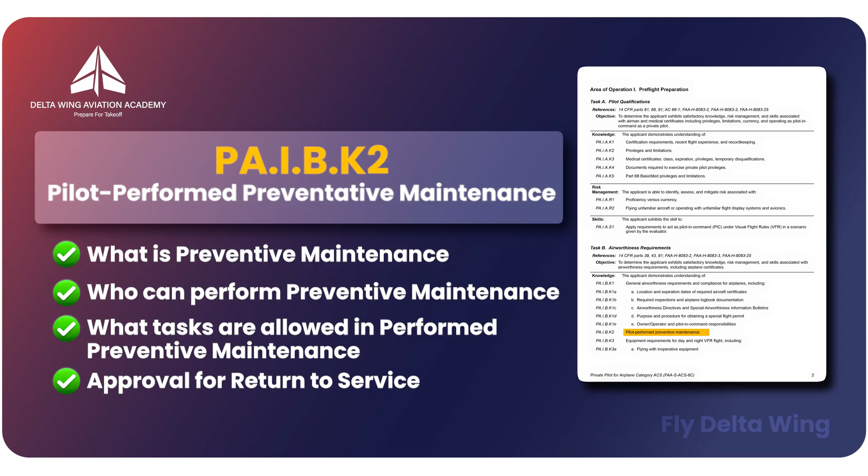In this video, we will focus on PA.I.B.K2, pilot-performed preventive maintenance. What is preventive maintenance? Who can perform preventive maintenance? What tasks are allowed? Approval for return to service. Logbook entry requirements. Before we begin, keep in mind that FAA regulations will appear on screen throughout the video. Feel free to pause, take notes, or capture screenshots for revision.

Now let's go step by step together. We'll break everything down using simple explanations, real-world examples, and checkride-focused understanding, so you can confidently apply this knowledge in exams and real operations. And if you're short on time, don't worry. Stay until the end, where we'll summarize everything in a quick and easy revision format. All right, pilots, let's begin.

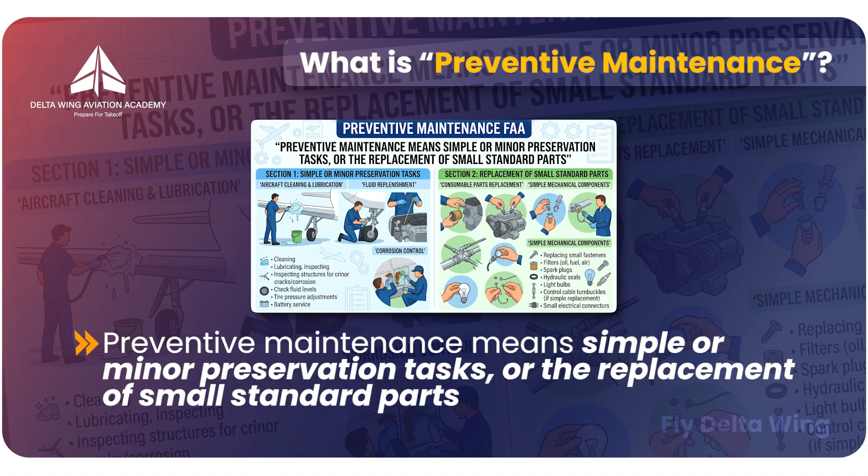So first, let's understand what preventive maintenance actually means. According to the FAA, defined in 14 CFR Part 43, Appendix A, and explained in the Pilot's Handbook of Aeronautical Knowledge, preventive maintenance means simple or minor preservation tasks or the replacement of small standard parts. It does not involve complex assembly or major disassembly.

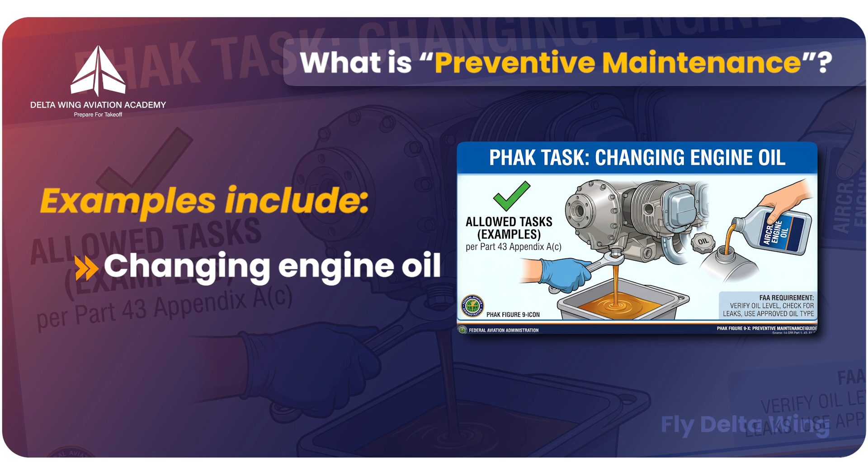The Pilot's Handbook of Aeronautical Knowledge, Chapter 9, defines it as simple or minor preservation operations that do not involve complex assembly. Examples include changing engine oil, replacing a tire, installing new spark plugs. You can find a full list in PHAK Chapter 9 and FAA Part 43 Appendix A. Now let's move on to who is actually allowed to perform it.

According to 14 CFR Section 43.3, any person holding at least a private pilot certificate may perform preventive maintenance. Key conditions: the aircraft must be owned or operated by the pilot. The aircraft must not be used for commercial operations, Part 121, 129, or 135. Part 121, air carriers. Part 135, air taxi. Part 129, foreign air carriers. The task must strictly qualify as preventive maintenance under Part 43. Since private pilots typically operate under Part 91, this requirement is usually satisfied.

Checkride tip. Under 14 CFR 43.3, a private pilot may perform preventive maintenance on an aircraft they own or operate, provided it is not operated under Parts 121, 135, or 129, and the task is listed as preventive maintenance under Part 43, Appendix A. Now let's move on and see what exactly is allowed. What preventive maintenance tasks can be performed?

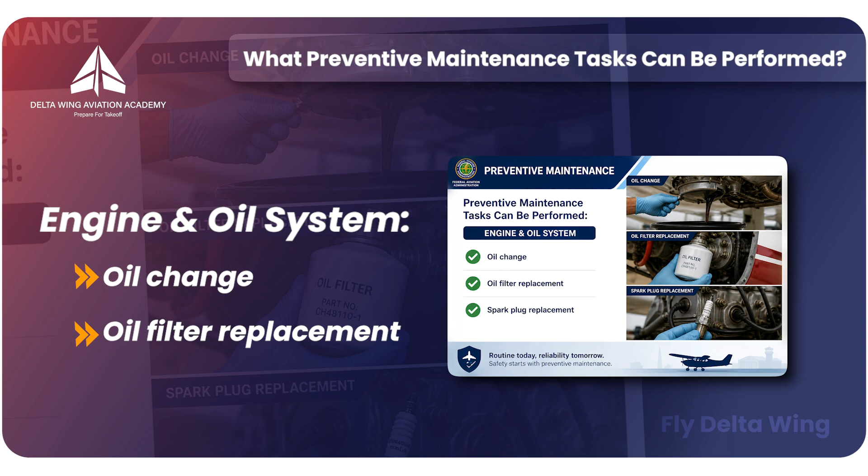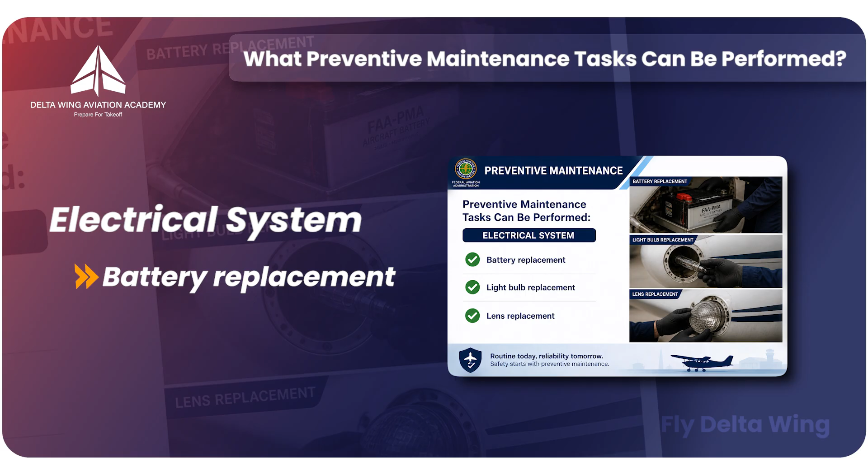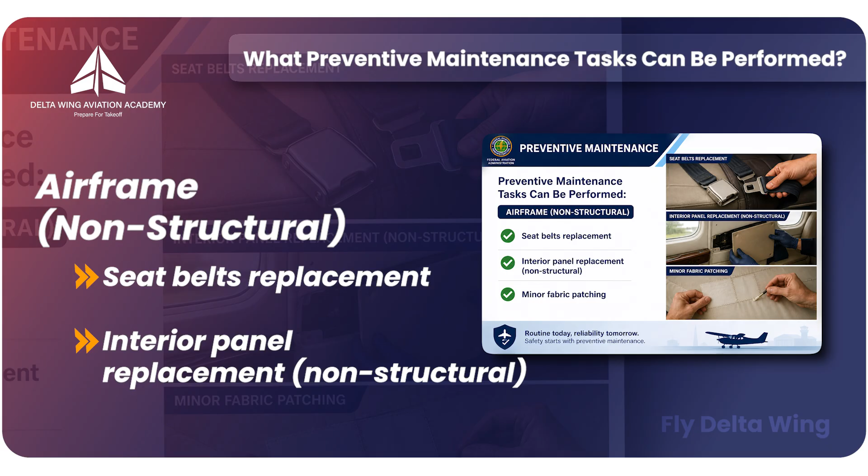Engine and oil system: oil change, oil filter replacement, spark plug replacement. Landing gear: tire replacement, tire servicing, minor strut servicing. Electrical system: battery replacement, light bulb replacement, lens replacement. Airframe non-structural: seat belt replacement, non-structural interior panel replacement, minor fabric patching. Hardware and miscellaneous: safety wire, cotter pins, standard bolts and nuts, lubrication.

What is not allowed? Engine overhauls or repairs, structural repairs, avionics installation or complex wiring, any major disassembly or reassembly. Easy way to remember: simple plus no complex assembly is preventive maintenance. Now let's move on to an important concept: approval for return to service.

According to 14 CFR Section 43.7(f), return to service means the required maintenance certification that confirms maintenance has been properly performed in accordance with applicable regulations. Simple explanation: after any maintenance, including preventive maintenance, the aircraft may not be operated until it has been properly returned to service in accordance with FAA regulations.

This means the maintenance has been completed correctly, the required logbook entry has been made under Section 43.9, and the appropriate person has signed the return to service statement. Now let's move on to who can actually approve it. A&P mechanic, yes. FAA repair station, yes. Private pilot, yes, only for preventive maintenance they personally performed under Section 43.3(g).

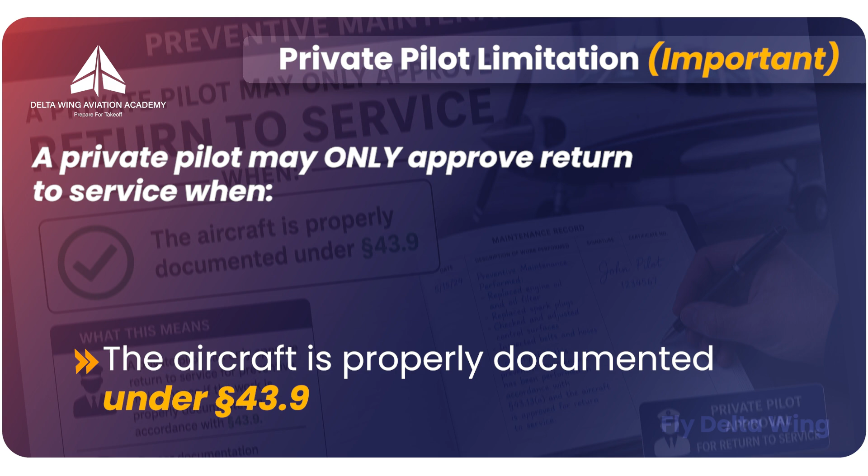Private pilot limitation, important. So here's the limitation you must remember. A private pilot may only approve return to service when they perform preventive maintenance themselves, the task is listed under 14 CFR Part 43, Appendix A, the aircraft is properly documented under Section 43.9, and the aircraft complies with Section 91.7, Airworthiness Responsibility.

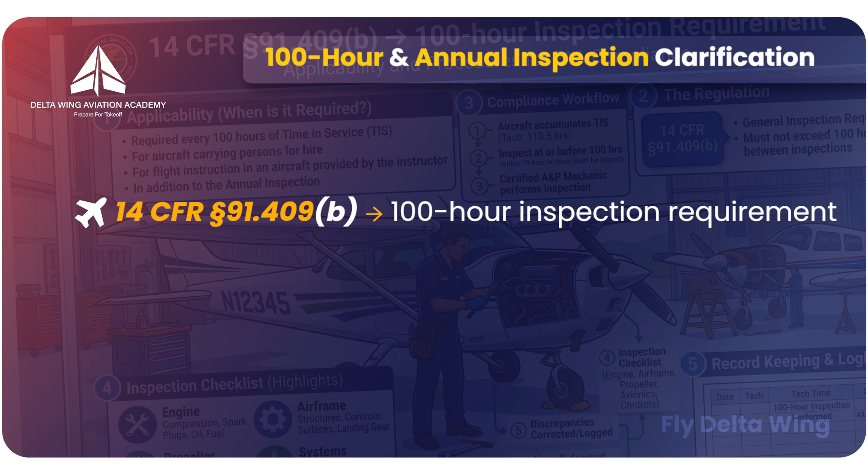Important note. Now let's be very clear. A private pilot cannot approve return to service for annual inspections, 100-hour inspections, major repairs, or alterations. 100-hour and annual inspection clarification. Now let's break this down clearly. 14 CFR Section 91.409(b) leads to the 100-hour inspection requirement. 14 CFR Section 91.409(a) leads to the annual inspection requirement. 14 CFR Section 43.7(f), return to service authorization.

So finally, a 100-hour inspection and annual inspection must be returned to service by a certificated A&P mechanic or an FAA-approved repair station, and a private pilot may not sign or approve these inspections. Now let's move on to documentation.

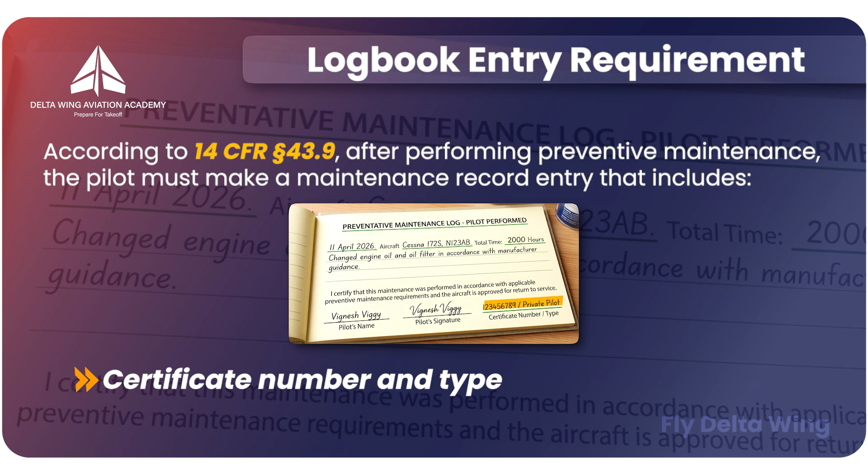Logbook entry requirement. According to 14 CFR Section 43.9, after performing preventive maintenance, the pilot must make a maintenance record entry that includes a description of work performed or reference to data used, date of completion, aircraft total time in service, statement of approval or disapproval for return to service, name of person performing work, signature, certificate number and type. So here's something very important. The entry is not required to state airworthy. It must state whether the aircraft is approved or not approved for return to service.

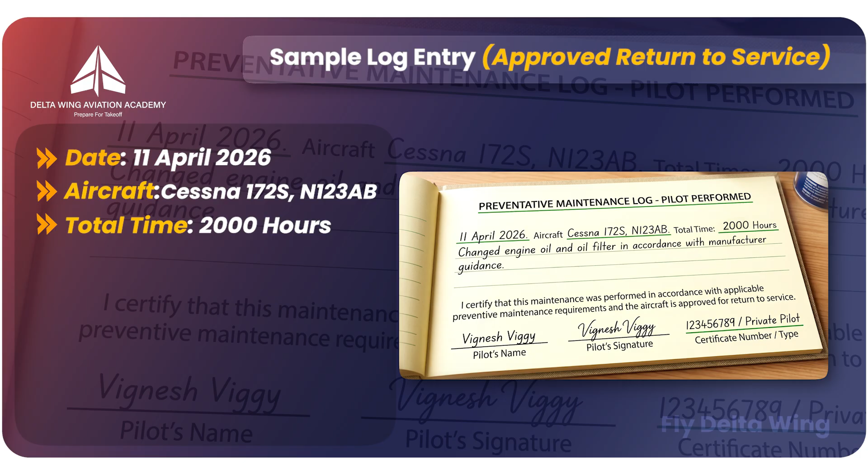Now let's see an example. Sample log entry, approved return to service. Date, April 11th, 2026. Aircraft, Cessna 172S, N123AB. Total time, 2,000 hours. Maintenance performed: changed engine oil and oil filter in accordance with manufacturer guidance.

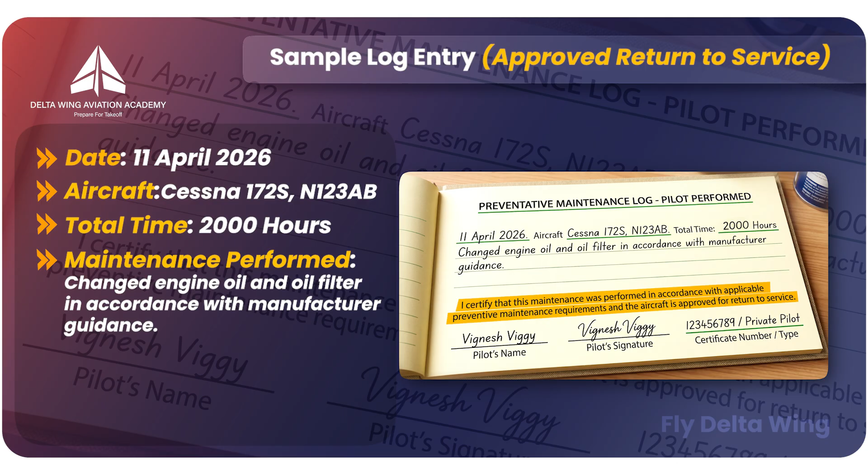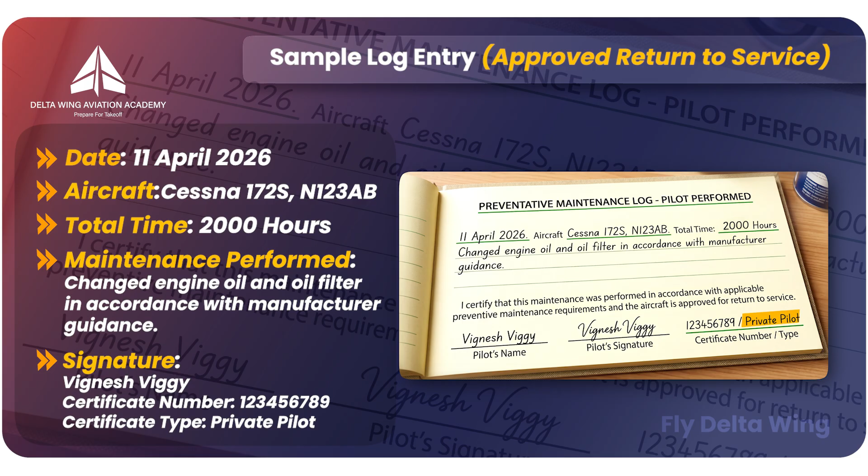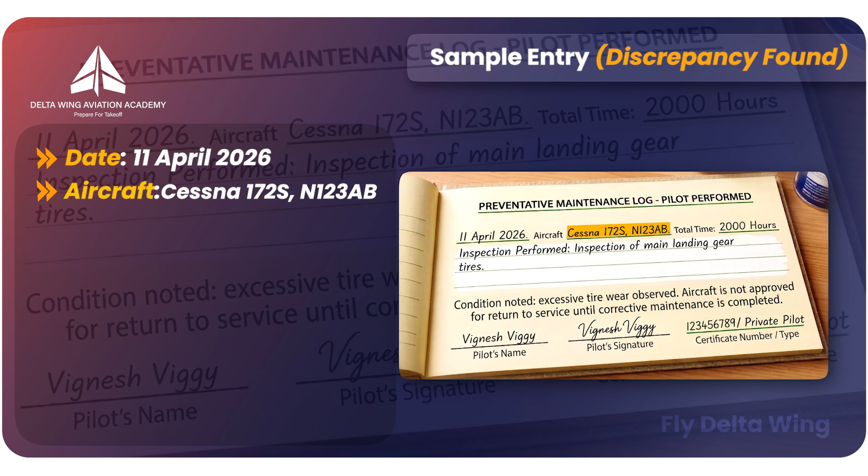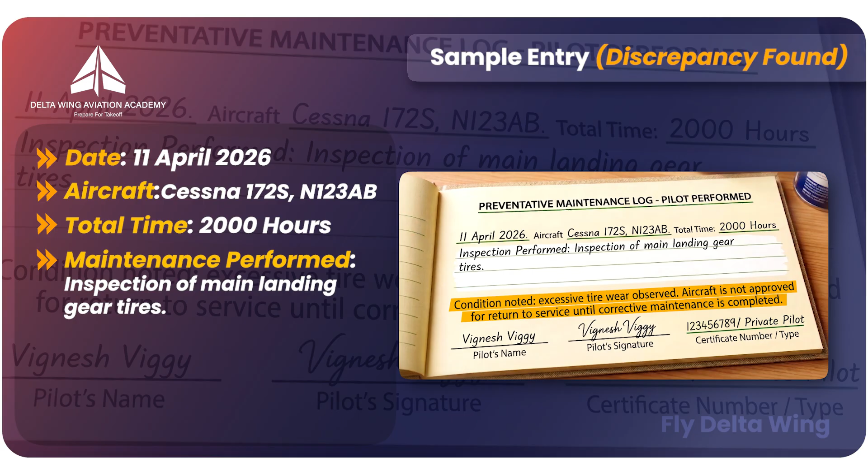Date, April 11th, 2026. Aircraft, Cessna 172S, N123AB. Total time, 2,000 hours. Maintenance performed: inspection of main landing gear tires. Statement: condition noted, excessive tire wear observed. Aircraft is not approved for return to service until corrective maintenance is completed. Name, signature, certificate number,

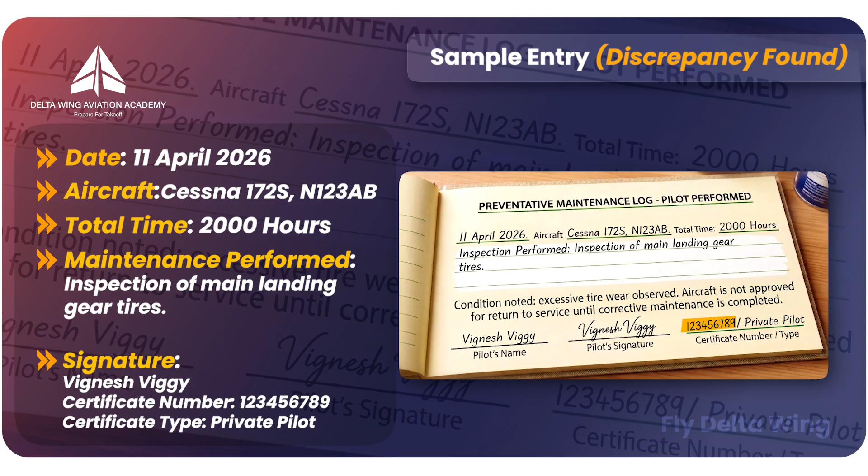Certificate type. Final checkride summary: preventive maintenance equals simple maintenance tasks, per Part 43 Appendix AC. Private pilots may perform it under Section 43.3G. A logbook entry is mandatory under Section 43.9. Return to service is allowed only if the pilot performed the work. 100-hour and annual inspections require mechanic approval.

Checkride-style oral questions. Now let's move into DPE-style questions. Examiner asks: can a pilot perform preventive maintenance on an aircraft used in a flight school rental fleet? Answer: yes, in many cases. A private pilot may perform preventive maintenance under 14 CFR Section 43.3G, if they are acting as the operator of the aircraft at that time.

The aircraft is not operated under Part 121, 135, or 129. The task is listed in 14 CFR Part 43 Appendix AC. The aircraft operator, flying club, or school permits it. Key FAA concept: ownership is not required. Operational control as the operator is what matters. However, the flight school or club may still restrict who can perform maintenance.

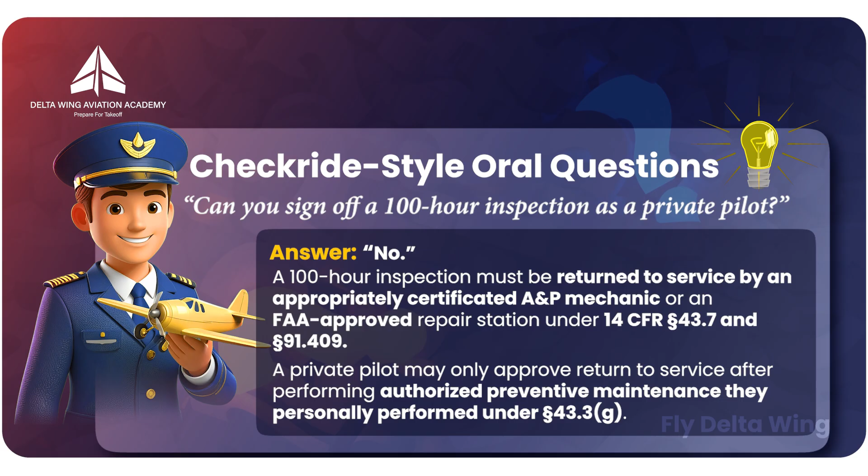Examiner asks: you perform an oil change on an aircraft you rent from a flying club. Can you sign it off in the logbook? Answer: yes, only if you meet 14 CFR Section 43.3G requirements. You must be acting as the operator of the aircraft, and the task must be listed under Part 43 Appendix AC. Rental alone is not enough. You must have operational control of the aircraft at the time of maintenance.

Examiner asks: you replace a worn tire on your aircraft. A friend who is an A&P mechanic supervises but does not perform the work. Who signs the return to service? Answer: the pilot who performed the preventive maintenance signs the logbook entry and return to service statement, provided the work is within Appendix AC. An A&P mechanic only signs return to service if they are performing or certifying maintenance within their required authority, not merely supervising.

Examiner asks: after performing preventive maintenance, you forget to make a logbook entry but fly the aircraft. Is the aircraft legal? Answer: no. The aircraft has not been properly returned to service under Section 43.9, so it is not in compliance with maintenance record requirements, even if the work was physically completed.